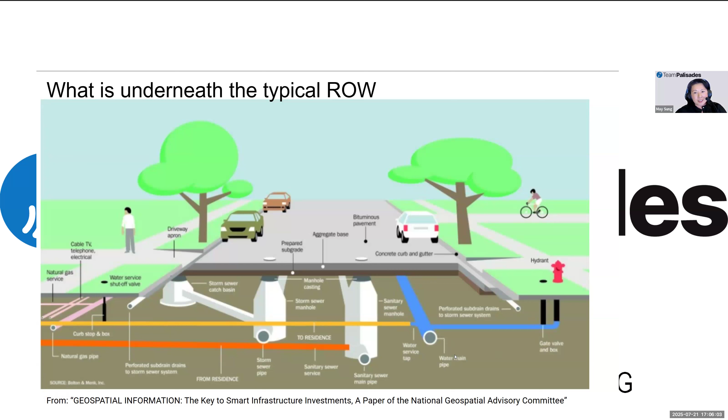I'd like to introduce our speaker tonight, Justin Skaggs. Justin's a dry utilities consultant, a Santa Monica resident, and he has worked with many local homeowners in the Palisades. He has consulted on numerous commercial projects such as Amazon and Apple facilities, and he's been very actively involved in both Palisades and Altadena recovery processes. So take it away, Justin.

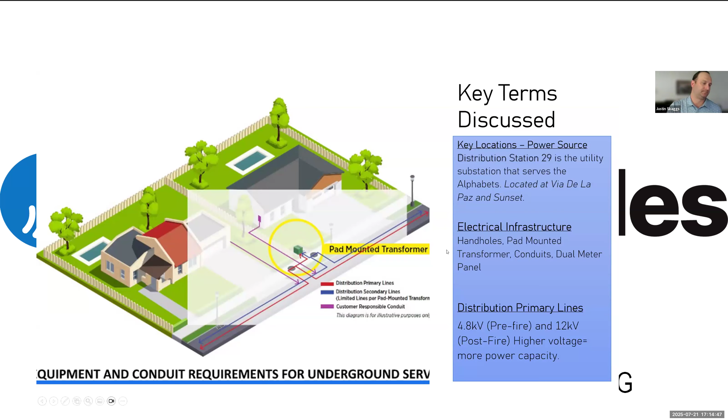Okay, why is this important to individual homeowners? Well, I know that there's a lot of confusion in all the groups and just in general. We need guidance. So homeowners must understand the participation requirements from the start to avoid project delays and confusion. If we have everyone kind of running around saying different things, it doesn't really help.

Lead the community forward. So I'm going to give you some of these terms, and again, talk with LADWP if anything doesn't make sense. You can always reach out to me as well, or any of the Team Palisades people here. So you might have been hearing from your architects and your builders, they need clear details and standards to

properly design and construct near the temporary poles and construct your new underground conduit. This is a really important point. Your builders can be going crazy, or your architects trying to figure out how to actually put that conduit in. And until we get those standards and clear descriptions, processes, this is going to just cause a lot more confusion. So we urge everyone that's involved on a city level or on the utility level, please expedite these new standards.

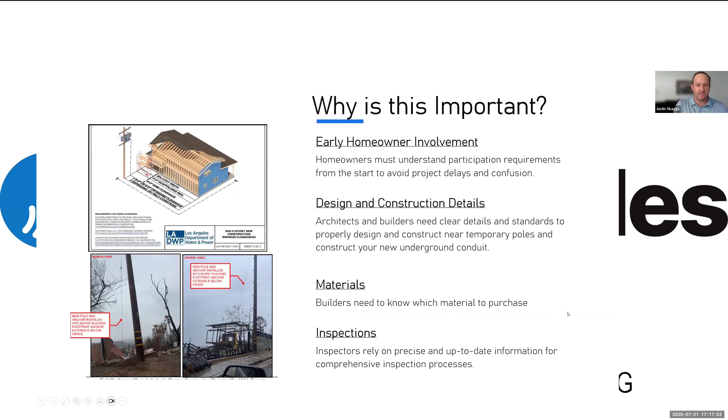There's clearance requirements around these pieces of equipment, and there's construction considerations. So again, the upper alphabets, Chautauqua, a few other streets, it's really important for you guys to get some clarity on undergrounding.

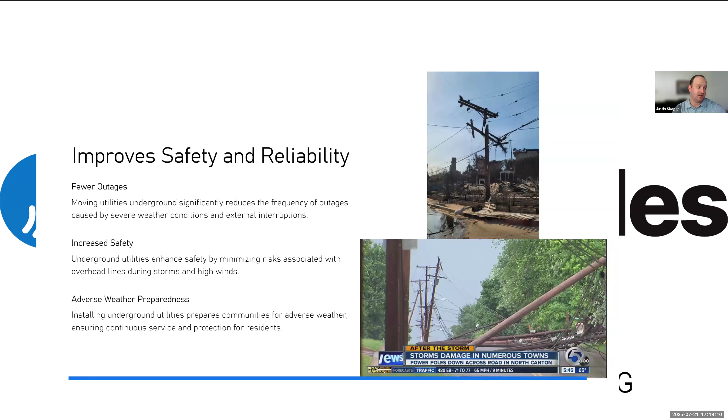So first, going over improved safety and reliability. This is a picture of a pole at the top from the Palisades, and then this is just a news program thing. So improving safety and reliability - you're going to have fewer outages by moving underground. It significantly reduces the frequency of outages caused by severe weather conditions and external interruptions. Increased safety - undergrounding utilities enhances safety by minimizing the risk associated with overhead lines during storms and high winds. Adverse weather preparedness - installing underground utilities prepares communities for adverse weather, ensuring continuous service and protection for the residents.

A really big one right here is increasing the property value. Normally, underground conversion is very, very difficult, and there is a value to it for your neighborhoods and for your individual properties. You guys have a once in a lifetime shot right here to get your infrastructure rebuilt to a level that you guys deserve.

So one of the things I want to point out on this picture to the right, this is a picture of the Huntingtons. Currently their service is underground. What I have shown in this picture, there is a manhole vault, and then there are 2 vault vents. So we'll get into those a little bit later, but this is where their transformers are. It's underground right there in the street.

So value appreciation: properties with underground utilities typically experience higher market values, attracting more potential buyers. Functional advantages: with underground utilities, neighborhoods often experience fewer outages and maintenance issues, leading to a better living experience.

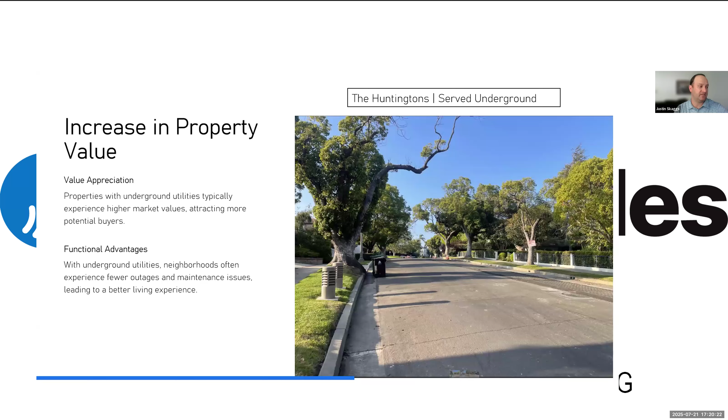This is a picture right here of the Highlands. This is another example of an underground district. Right here at the bottom of this picture, we have the manhole cover.

Justin, you just froze. Hold on, let me text him. Okay. Oh, let me see, sorry about this. Technical issues, we will get him back. Yes.

Okay, so why don't we answer some of the questions that we know then, actually? So Allison, do you want to read off some of the questions?

Sure, happy to read the first question. Are all alphabet streets power being undergrounded? If so, what do we need to provide, and what does the utility provide in terms of vaults and feeds? This is why we're having this webinar, so that we could get answers, and also answers from DWP, and to equip ourselves with knowledge.

All right, so yeah, this is another method of undergrounding. You can see the manhole vault right there, and this little circular thing right here. This is the old way of doing vents. They don't really do that anymore flush on the sidewalk because it can get debris stuck in it. So now you're going to see these a little bit larger vault vents.

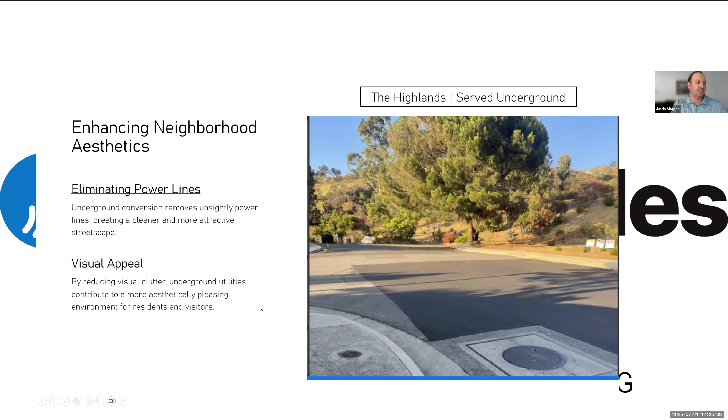Visual appeal: by reducing visual clutter, underground utilities contribute to a more aesthetically pleasing environment for residents and visitors. So again, this is the Highland, or the Highlands.

And then environmental benefits and sustainability: by reducing the weather impact, moving underground helps minimize damage caused by severe weather events. It promotes green practices; underground utilities support environmental sustainability by facilitating cleaner landscapes and reducing surface clutter.

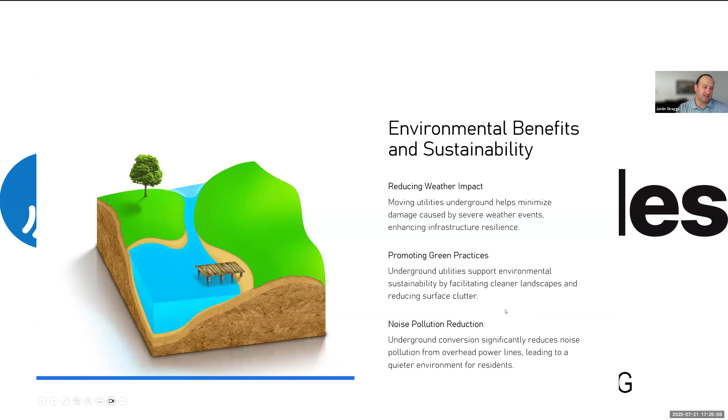Noise pollution reduction: I've heard from a few residents on Iliff Street that you guys have a bunch of cell towers with generators. Some of you might have heard when you're just walking around, you hear a buzzing sound - that's the electrical being pumped through the grid, and it can get very loud in some places. So underground conversion significantly reduces noise pollution from overhead lines.

So how does power get to my house? You've heard about how you get power - you can get it from wind, solar, gas, coal, nuclear, and hydro. All of those sources are being utilized right now by LADWP. There is a program where they're phasing out coal, gas, and nuclear, and that is a very, very large initiative with LADWP.

So what we are going to be focusing on for underground conversion purposes and for your specific blocks is at the distribution level, where it goes to the DS box, then to the 4.8, then it hits that transformer and goes to the residential property. That's your house. So the undergrounding we would be doing is from that distribution station, removing those poles, down to the residents.

This is a picture of what typical overhead distribution looks like. This is a slide from Cal Poly Pomona, held by Southern California Edison planners.

It shows a primary 12 kV. Your existing service before was at 4.8; your future service is going to be at 12 kV. Your power source was distribution station 29 at the intersection of Via de la Paz, and you guys utilized pole mounted transformers right here. So looking at this photo, this is your primary voltage, and this is going to go underground, the primary 12 kV. Your secondaries, the 120/240V, would go underground as well, from the transformer to your property.

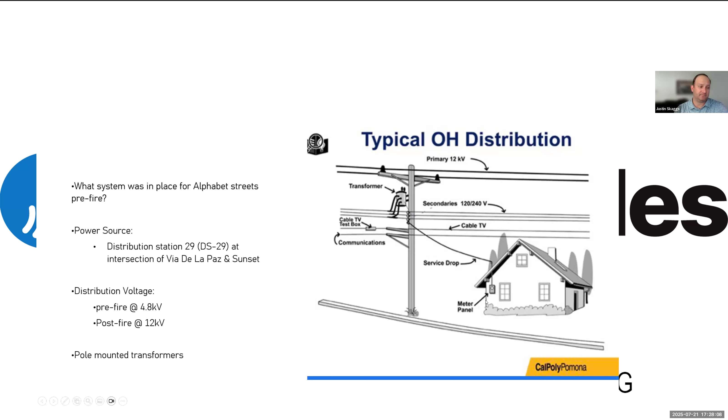What is a transformer and why are these important? The old system had higher fire risk, with pole-mounted transformers being those gray cylinder cans on the wooden poles. Transformers are used to step down higher voltage electricity to a lower voltage for you to use. You can't just plug straight from the grid into your cell phone - it would cause a lot of problems.

So how fires can start: high winds can cause lines to slap together or be hit by branches, creating sparks that ignite dry vegetation.

And this answers your question about whether all the streets are going to be eligible. This is a design question, and we need to look at all these different options.

So where can a transformer be placed? These are some slides from Southern California Edison. You can have your residential transformer on a pad - that's the green thing. You could put it in a vault underground, as we saw on the Huntingtons and Highlands streets - that's what's underneath that you actually don't see. These vaults might not be able to be used for the narrow streets up top. And lastly, we have inside of a building - this is not suitable for residential neighborhoods, but just so you get the full spectrum of where we can put our transformers.

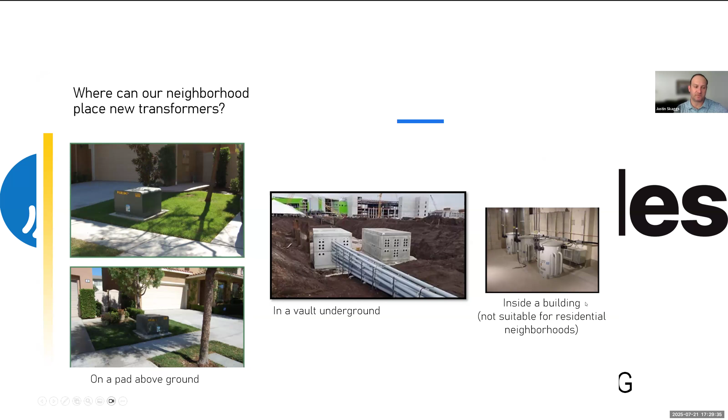The new standard for rebuilding is low fire risk, pad-mounted transformers - the green secure metal cabinets on a concrete slab. High voltage lines are buried in protective conduits. Why it's safer: it eliminates the risk of wind-related sparks by shielding power lines from weather and falling branches.

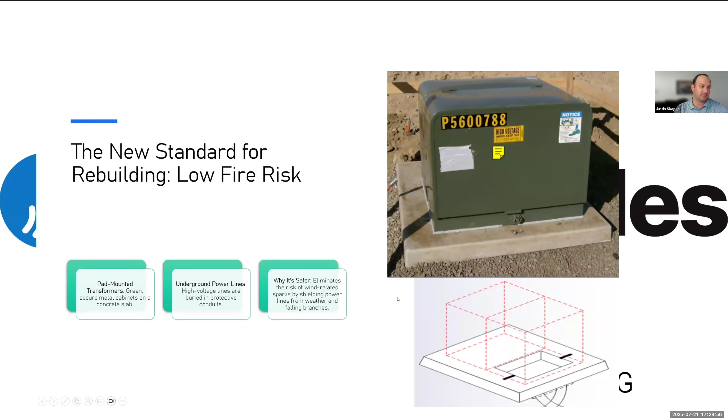This slide was taken from the LADWP Town Hall, and there's a few things we need to explain about what this is showing. This shows a concrete transformer pad that is 5 foot by 7 feet, sticking up about 3-4 inches off the ground. Then you have an easement shown here, that's the 11 feet by 15 feet. It looks like from the slide that could be showing something on private property.

What we're going to do is show a few examples from other jurisdictions. You don't have to have this on private property - it can be in the public right of way, in your parkway, or it can be underground. The little green box, that's something we haven't mentioned as well - that's typically going to be about 2 to 4 feet high, so it's not going to be very large or intrusive.

But this is important, the 11 by 15 foot space - you can't build in that area. So we want to look at other options that are more advantageous to your neighborhoods.

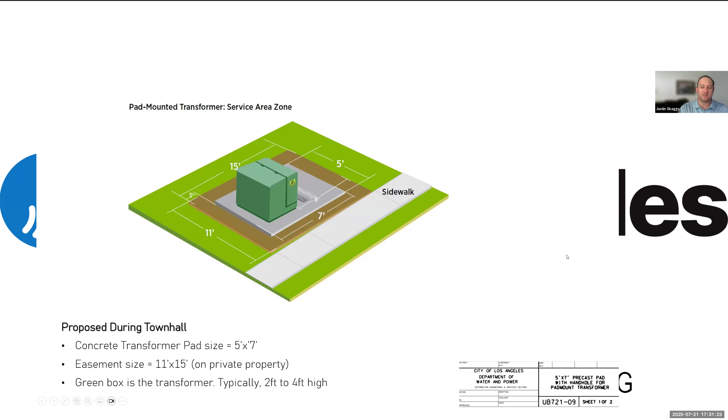Right down here at the bottom too, this is the 5 by 7 precast pad with a handhole for the pad mounted transformer - that's the standard currently in their guidebook. Again, we need confirmation if these types of materials are the same ones that we can use, and that's really important.

So when you look at that pad that's 5 foot by 7 feet, and then you see that larger 11 by 15 foot space, why do you need all that clearance space? Well, the large working space in front of a transformer reduces the risk of accidents or collisions, creating a safer environment for everyone.

As you can see, Southern California Edison has a whole guidebook on how you could do your landscaping and screening to protect it. So there are options for us to make that not look so ugly, I guess.

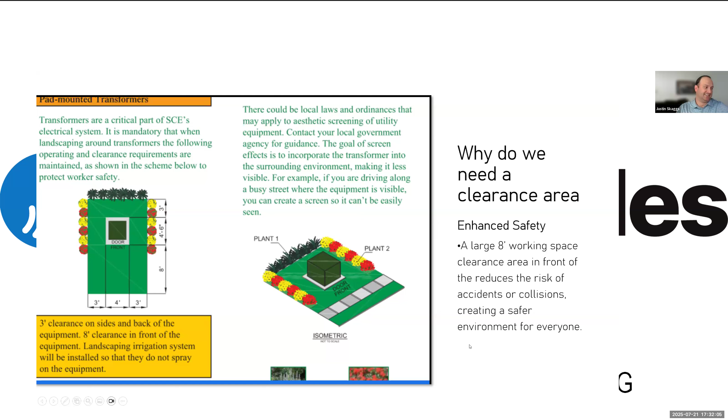If you look at Playa Vista, I was talking to a gentleman from Brookfield Residential who helped build that. He mentioned that when planning where to put their transformers, they were screening them, painting them, and wrapping them. It's a really good idea. I encouraged that gentleman, who has come to Team Palisades a few times, to talk the team through the steps needed to actually get that painting and screening done.

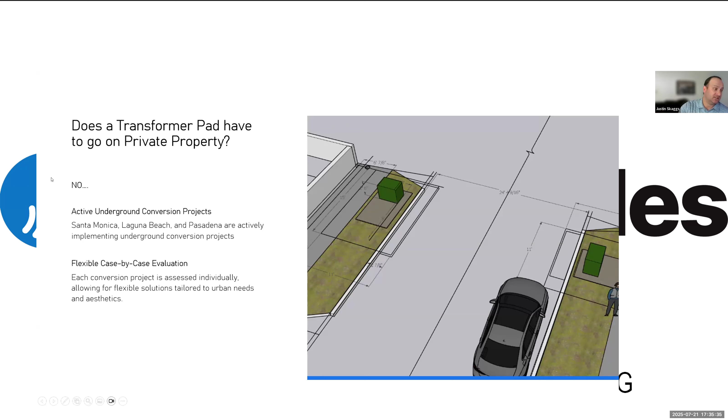This is another picture, an example from SCE guidelines. Most active projects utilize transformer vaults for underground conversions, though if streets are very cluttered or narrow, they'll go with pad mounts instead. This shows what it looks like when a pad mounted structure, at the bottom, is on private property, versus another scenario at the top where the pad mount is in the public right-of-way.

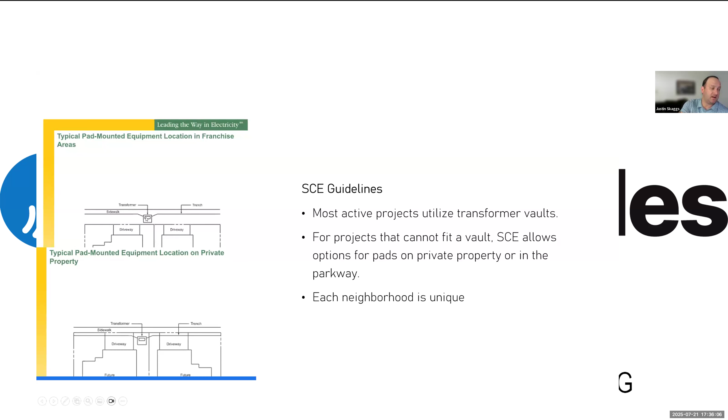Another option is 12 kV design standards, which we encourage our local representatives to study and look into—transformers and vaults utilizing buried underground switches. This is a great model for underground conversion and is being actively employed in Laguna Beach, which has similar hillside streets, is an ocean community, and has very small narrow alleys. Let's explore if we can get that done in the Palisades.

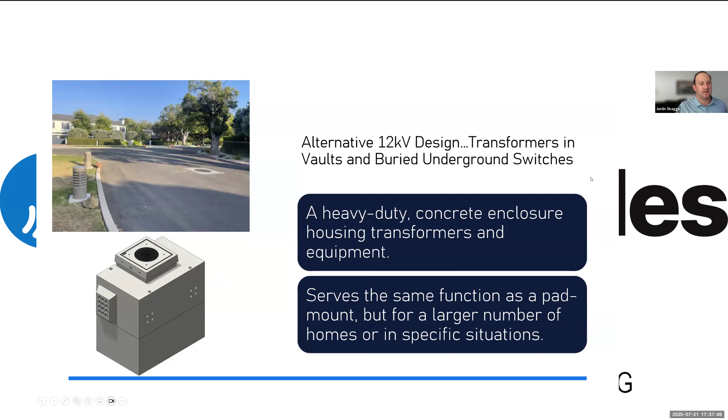This was another item that was discussed during the call. They were talking about a handhole and conduit.

There are pretty much only 2 handhole providers that are eligible to sell to LADWP, so we really want to be procuring these items if they are going to be needed. It's very important that the whole industry that produces these handholes and vaults knows what system we're actually going to be constructing. They all have model numbers and specific sizes, so it's very important that we get the exact spec of the handhole that's required. If your builders are going to purchase a handhole, we really need to get confirmation on the size before you do that.

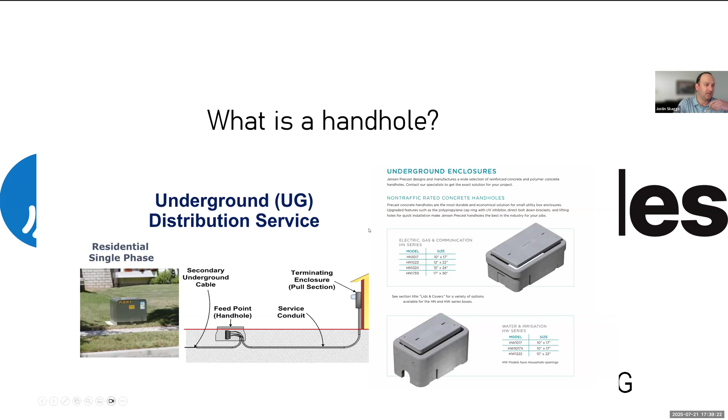Electrical conduit's purpose is to provide protective tubing for wires, preventing physical damage. It goes at a certain depth, gets a certain mixture of concrete, and goes on a certain bedding.

Also, you need to get the conduit for Frontier and Spectrum. It's going to be great if we can get those all in the same trench. If it's a joint trench or a parallel trench, either way, whatever you want to call it, it can go in the same trench and be installed at the same time.

Your LADWP electric service representative will be inspecting this at multiple occasions to ensure compliance with the standards. So when your builder says they can't get the inspector out here to do anything, that's a staffing level issue, and hopefully with ACOM that's something we can help fix. Your ESR is going to be inspecting it. There is an ESR assigned for the Palisades, and your builders will know who that is. This is a very important person who's going to dictate how your project is built.

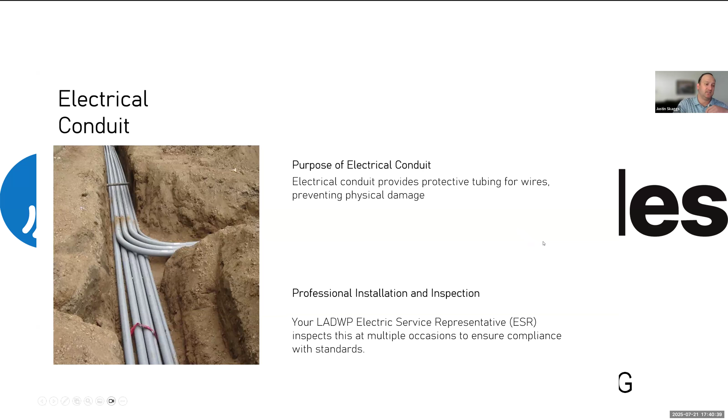Next, what kind of meter should we buy? What you need is a dual meter panel that can connect to both the overhead and the underground. Make sure your builder and your electrician contractor are purchasing a panel that can connect to both. That's critical, because you don't want to install something that can't actually be converted to underground, where you'd be digging up your hardscape, redoing everything, and getting your property rewired. It's really important that they understand you want both an overhead service line connection and an underground service line connection.

Specifically, of where that underground conduit is going to go, we need DWP to design that. There are other options we can get into maybe in the question and answer. Each of those panels has to be material spec that works for DWP.

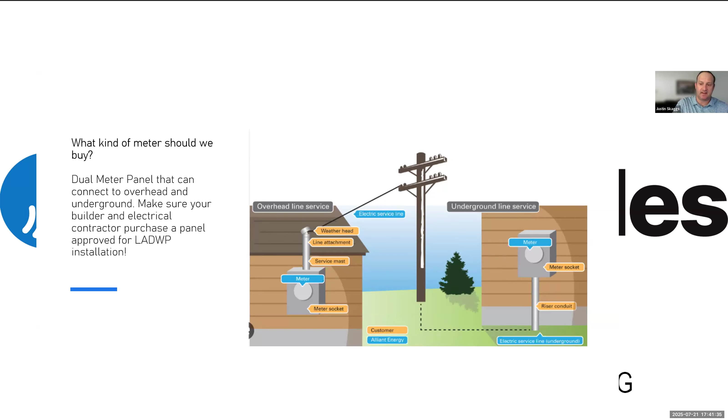I'm going to go through these a little faster now because I'm losing time. This is a San Diego Gas and Electric standard that clearly defines what roles and responsibilities your contractor has versus the utility. As you can see, the transformer pad here is in the street or the parkway, not on the private property.

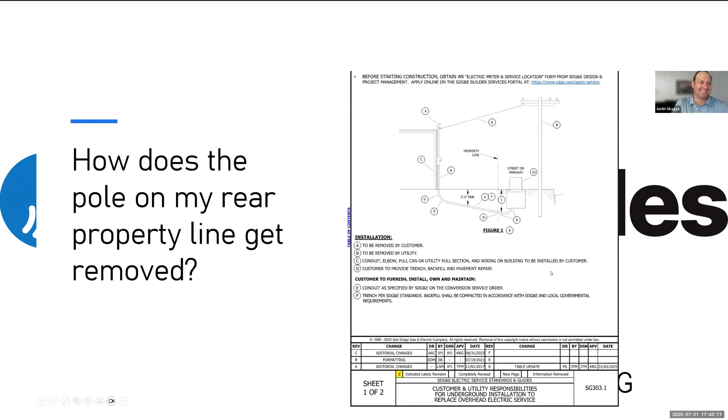Key players - don't forget the telecom providers. To complete undergrounding and removing a utility pole requires all occupants to relocate their cables and conduit underground for full removal. Telecommunications on your poles, Frontier and Spectrum, Charter - their emails still say Charter, but Spectrum and Charter are the same thing. This is their franchise area.

Key players: the city council and the mayor's office. A player we haven't talked about is the CPUC. The CPUC does not oversee LADWP design standards the same way it oversees San Diego Gas and Electric, PG&E, and Southern California Edison. LADWP is a municipality, while those other groups are investor-owned utilities. The CPUC is the California Public Utilities Commission. One thing we're encouraging your elected officials to do is talk to the CPUC - they provide a guidebook on how to manage these underground conversion projects for policymakers. I know it's very confusing.

I've worked with some of the largest developers and companies in the world, and they all need a little help. It's new to everyone. It's a very complex, intricate system, making an underground conversion project work. We can do it, and we really encourage your elected officials to adopt this guidebook.

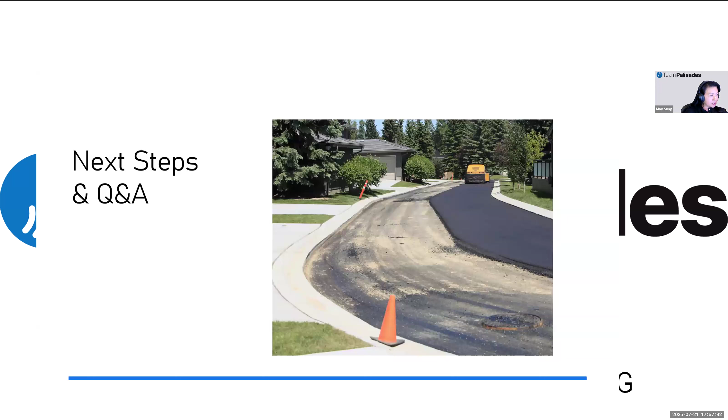So what's next on our queue? I'm trying to answer them, there's a lot of questions, I'm trying to type them out. Is it important that the work takes place prior? Justin said no - you can get your permits, you can start building now.

The next question: for the houses, when the transformers for the neighborhood would be placed, are there any risks for EMF? That's a Justin question - I'm not an expert on that, so we'll need to wait for Justin.

Then Kari, do you want to ask Reza's question? I think that's already been answered, about being able to put those things on the parkway. So Justin's back, so maybe let's pick up where we left off.

Okay, 12kV can be underground or overhead - that was my answer. So I think we're going to go, because I think Tamara's question was already answered.

For the houses where the transformers for the neighborhood would be placed, are there any risks of higher rate of EMFs? That's a good question for LADWP.

One thing too is if you get it in a vault or if you get it on the parkway, it's not going to be put on your property. I'm sure there's a lot of studies, and there are more appropriate people that understand the science behind it, but that's a good question.

All right, so we're at 5:58. Yuri has had his hand raised for a long time. All the questions in the chat, we will try to consolidate, and hopefully forward these to DWP and get answers from them. These are all great questions, and we definitely need an answer.